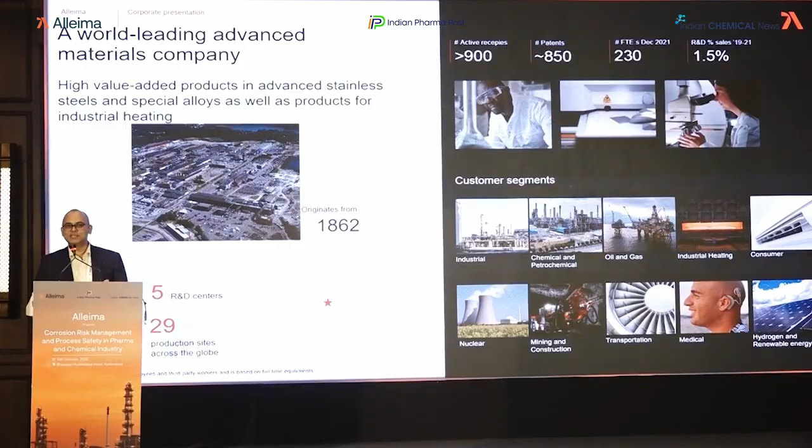All right, so this is already presented, but I think what is very important here is that we are an R&D driven company. That's a very old company, but at the same time, always in the market, we launch new grades. And thanks to you guys, in fact, you are the inspiration - you always come with a problem, and then we try to understand, okay, where's the gap, and then we try to give the solution, and then we come up with a new product. And that's how we grow, and we offer new solutions. There is not a single segment, Yadvendra already said, that we are not catering to - so you name it and we are there.

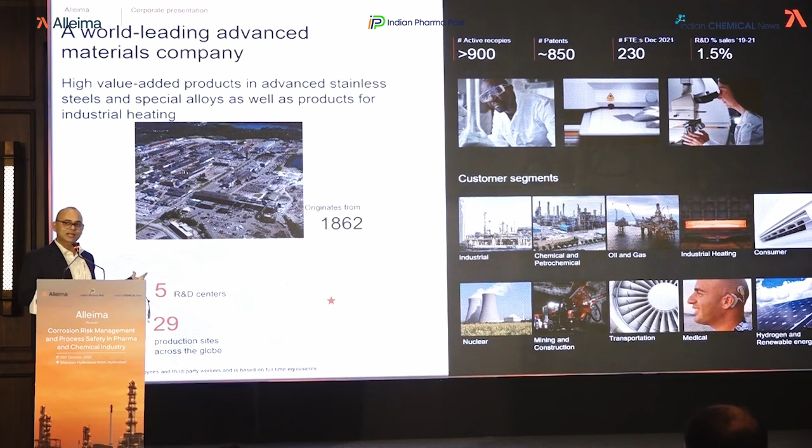Then out of the several facilities that we have, something very important that we call the workhorse of our lab is the scanning electron microscope. One facility that can give many kinds of information. I'd like to apologize here, I'll go a bit technical, but I think that is very, very important, and I'll try to keep it simple.

So you are using metallurgy in your day-to-day activities. You have heat exchangers, and you are using different grades. Whenever you have failures, you come to us - I'm talking about the different customers that we are serving - and what we do is we take a small sample out of that, prepare it, and put it in the electron microscope. This electron microscope is very, very useful. In that, basically, you have the accelerating voltage, and your electron hits the sample, and then you have different kinds of information. This information is like the chemistry of the material,

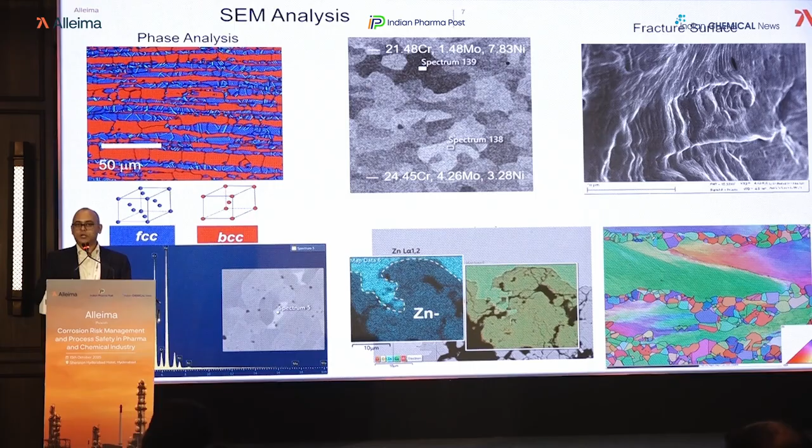So it's one facility, like one size fits all kind of thing. And then you can use this to check the quality of your material of construction, whether it's right or not, and it can also give you the failure trend.

So yes, we do a lot of failure investigation, and for that we are using this facility a lot. This is how we do the failure investigation. I've put it in a very simple way.

Whenever we receive samples from your application, the first thing we do is assign a case ID. This is how you track your sample, and then we preserve that, like a report or something, after this.

Then the first thing we start with is visual inspection, which tells you where the problem area is. Then we take samples from that - small samples from the bad location and from the good location - so that you'll have more data.

The next thing we do is prepare the sample. Sample preparation is very, very important. If you are not preparing it properly, consider it like reading a book with some ink blotted on it - then your information is not clear. Sample preparation is like that only, so you should do it very nicely. There should not be a scratch, otherwise there will be misinformation.

Then we take those samples for light optical microscopy, stereo microscope, and scanning electron microscope, and we put the data from this analysis together. Sometimes we send samples to an external lab - here Paresh sir is there - so we send to labs like TCR.

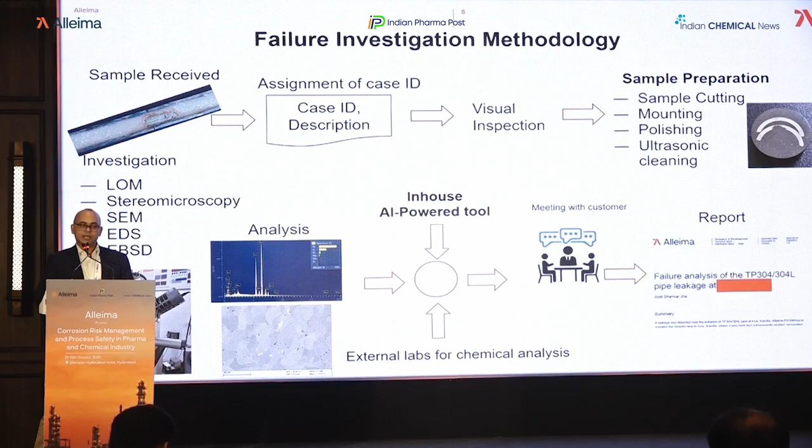All right, so this is how we use this AI. A very interesting thing going on in our organization is digitization - I think that's everywhere. We are a very old company, and the advantage we have is that we have reports, around more than 60,000 of them.

And then we have a tool we call Alleima Guru, based on all the 60,000 reports that we have. We have so much data, you can call it a gold mine actually. So you can ask this tool - I have such and such process, I'm using this grade - what can be the challenges, or what do you think could be the right grade?

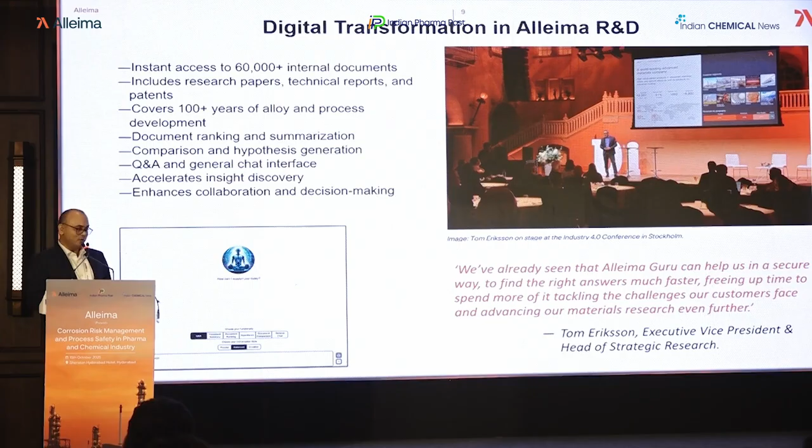This can help you in doing that, and we are using it a lot. Our Executive Vice President, Tom Eriksson, is in one of the conferences - the photo you can see is him in Stockholm in front of many customers talking about the Alleima Guru in the Industry 4.0 conference.

Let's look into some of the failure investigations. The one I'd like to bring to you is the ERW tube. This is the welded tube, and there are some weak points in welded tubes. We'll talk about that. This is how the tubes are produced for the heat exchanger - these are like ERW tubes, welded tubes.

So basically you take a sheet, round it, and then weld it - that's the seam. So what you're seeing is the seamed one. The other process is called seamless. Seamless uses the hot piercing technique, generally used for bigger diameter. But for smaller diameter, what's important is the hot extrusion process. We'll talk about the difference between hot piercing and hot extrusion, which was already touched upon.

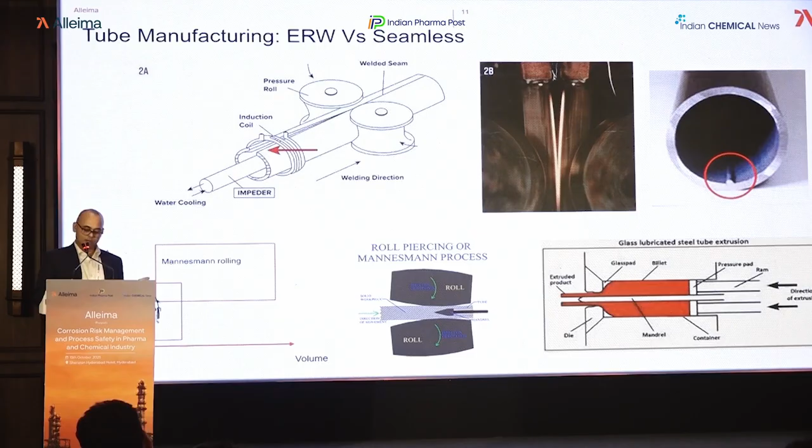Let's see what can go wrong with the ERW tube. My first example is when an ERW tube was used in one of the wastewater evaporators, and here you had chloride in the media. This was 316 Ti. This morning I was talking to someone who has the similar grade.

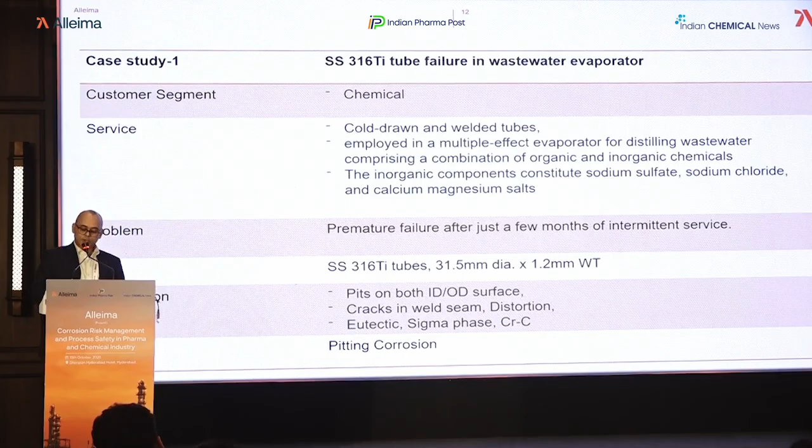Whenever you have a welded tube, you could see corrosion - some funny features here, sometimes you see something like this. This is on the OD side - this is how it was looking. From the ID side, the inner surface, you can see there is a seam, and on that seam you have some cracks, and you can see some groove features also.

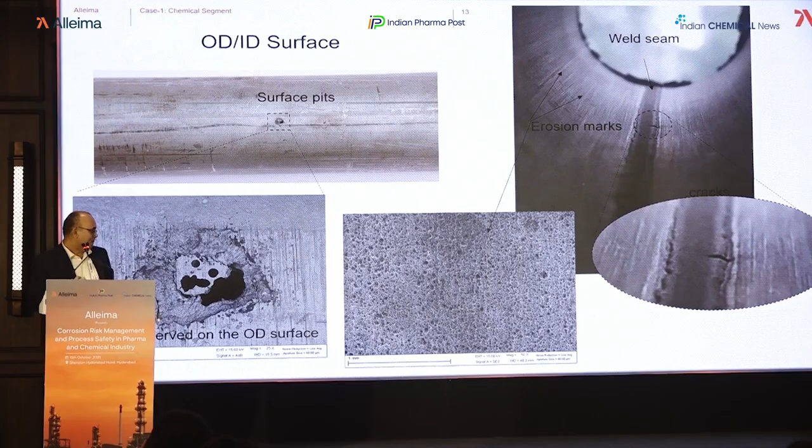Whenever you have a groove feature, that's a sign of erosion - your material is basically being removed. There were also a lot of pit marks. Wherever there was a crack, we took a cross-section, a transverse section, and what we could see is that there's a big pit in the welded area.

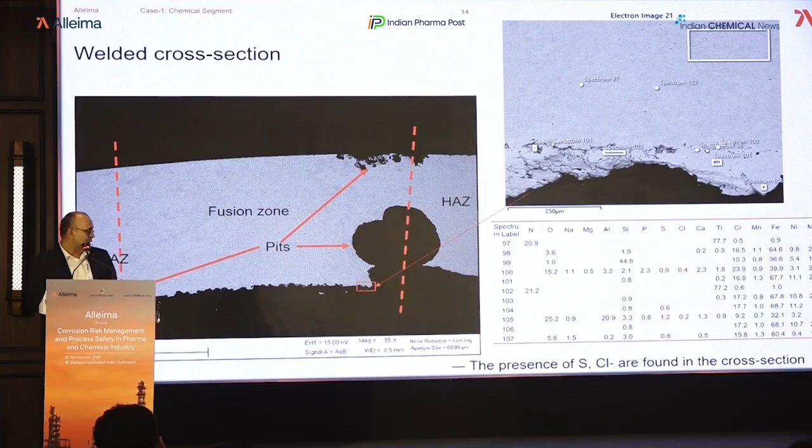Whenever you do welding, you have a fusion zone, and next to that you have a heat affected zone, which is basically at lower temperature. If you have stainless steel, that has its own challenges - we'll talk about that. We could see that most of the pitting occurred in the heat affected zone, but of course here we can see it was also in the fusion zone.

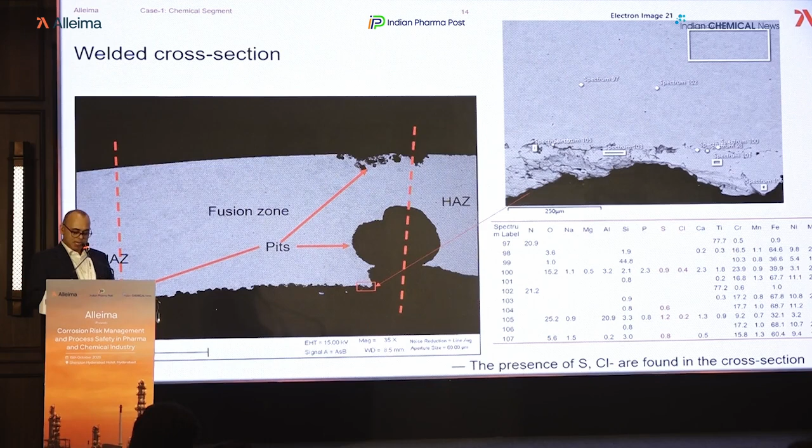Let's look into the microstructure in the heat affected zone and fusion zone. You can see there's variation in the microstructure, suggesting there is some temperature gradient. If you go from fusion zone to heat affected zone to base metal, you have a temperature gradient - going from fusion zone to heat affected zone, temperature varies from 400 to 800.

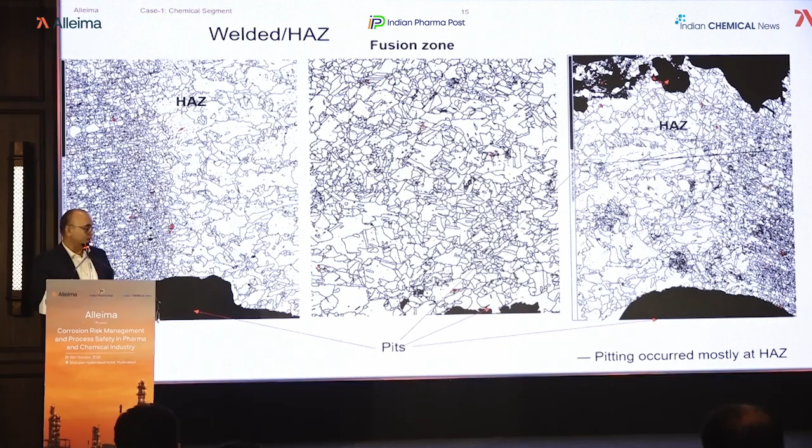In that region there are chances of intermetallic phase formation. So we use the EDS that I showed you to see what phases are forming. On the left-hand side, you have a bright phase at the grain boundary - that bright phase is generally called intermetallic, and it varies from grade to grade. There you have chromium and molybdenum, which are very important - they give you the corrosion resistance.

Then you have segregation of those phases at the grain boundary. What may happen is that overall your chromium and molybdenum percentage will reduce in the alloy, and your corrosion resistance will decrease. That's the harmful effect of this intermetallic phase formation.

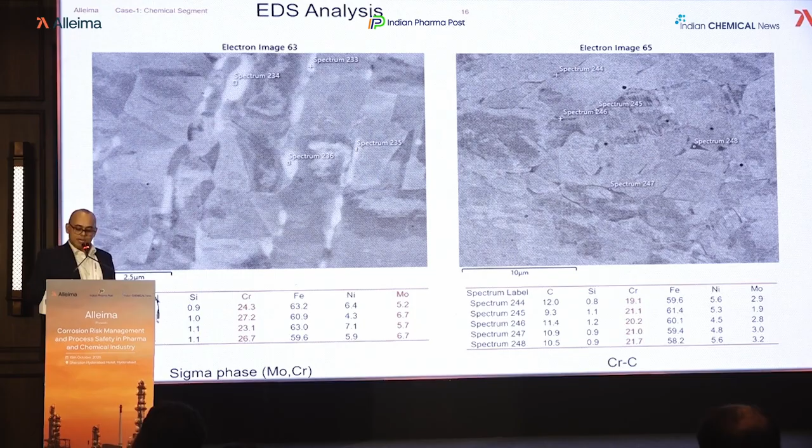On the right-hand side, you have chromium carbide forming at the grain boundary. If that chromium carbide is there, that's called sensitization in your material in the heat affected zone. Sensitization means if you have chromium carbide, then in the vicinity of that you have a depleted zone, which is prone to intergranular attack.

You can see that there's an intergranular attack. And then this is the schematic. If you have some sigma phase, that's an intermetallic, then what happens is your passive layer that basically protects or gives the corrosion resistance to stainless steel, that weakens.

And then if you have chloride in the media, the weaker region gets attacked by the chloride through this electrochemical process. And then your pitting, so pitting is a small corrosion pit kind of feature, it forms, and then it grows, and then you have leakages.

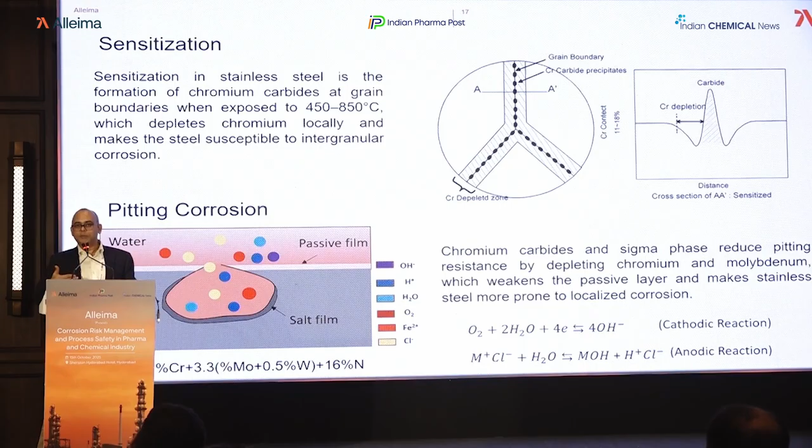So then the term you will hear a lot is PREN, pitting resistance equivalent number. So what will happen if such phases are there? Your PREN number will reduce locally. And in general, higher the PREN number, better the corrosion resistance. That is one way you can select the grade based on the PREN number, but that is a crude way, not the exact way. But in general, higher the PREN number, better the corrosion resistance.

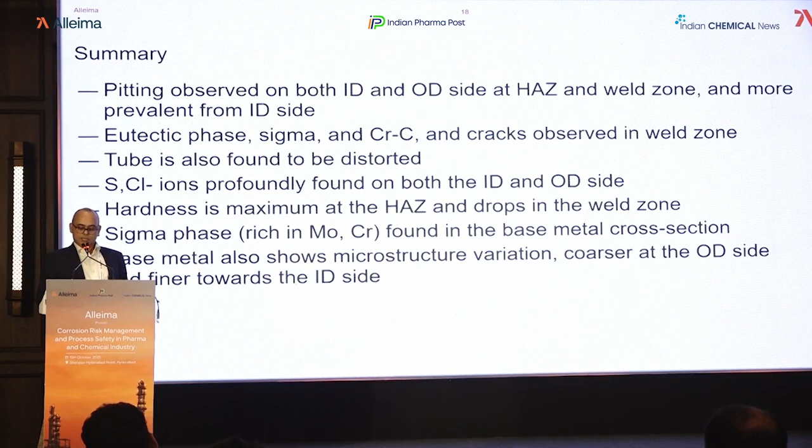So, summary of that is that with this ERW tube, you will have to be very careful if you are using it. There is a chance that you may have all those intermetallics form in the heat affected zone, exactly as happened here. Then let's look into the second example where titanium was used, and here also it was ERW, so it was welded.

You could see the condition of this. This was in the chemical segment, soda ash plant. And you could see how badly these tubes are - you have the scales on that. And seeing it, you can see that it's very brittle, very thin, and embrittled, right?

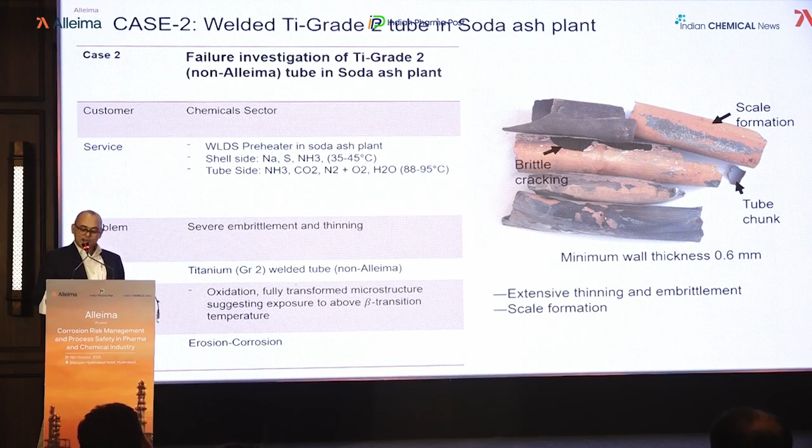So why it happened, let's look into. So then again, as usual, we do the same analysis, take a small section, and look into it under the microscope. So what we can see is a thick scale forming, that is titanium oxide.

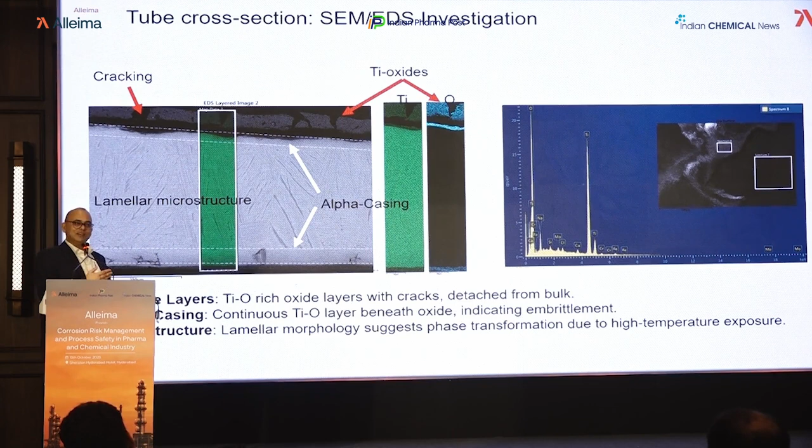And then in the cross section, the microstructure, if you know titanium, this is a very unusual microstructure. You don't expect that. Then again, it's not very clear, so there's another technique we discussed, that is EBSD.

So you get the colorful image, and you could see that these two case-like features, the layer kind of feature you're seeing from both sides, those are basically alpha case, we call it. And in the center, you have a lamellar kind of morphology. Ideally you should have an equiaxed kind of microstructure, but what you are seeing is the lamellar kind.

I worked in titanium a lot, so I know. This is generally when it is exposed to high temperature, and when you are cooling it, then you get this kind of microstructure.

And when we talked to the customer and asked, has it been exposed to high temperature? The customer agreed, yes, there was a fire accident actually in this plant. So this is like, I wanted to make a point about why this material selection is very, very important. What went wrong, I don't know, but this is a safety concern.

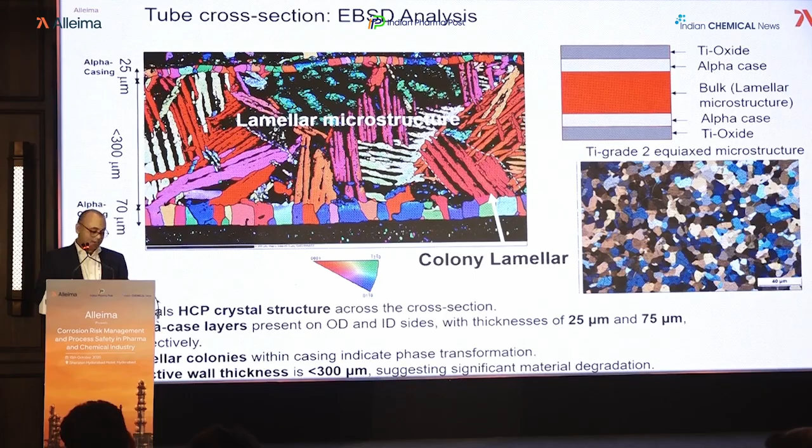So, yes, these were two examples where ERW tubes had some weak points, and it's better to go with seamless. But it is not like if it is seamless then it will not fail - no, that is not the case. Seamless does have problems, though it's better than ERW, but it still has problems if the quality of the tube, and when you're talking about quality, it's metallurgy, and it's also related to your processes. If that is not good - let's look into a few examples.

This you may be familiar with because this is from your pharma segment only. This is the mechanical vapor recompression system. Here you have a feed, and then a chamber that is exposed to high temperature, and your feed converts to vapor, and then you have concentrate, which you collect, and it again goes into your system. You have a high compressor that basically works on Boyle's law, so you have high pressure, and that gives you high temperature, and then again you reuse it.

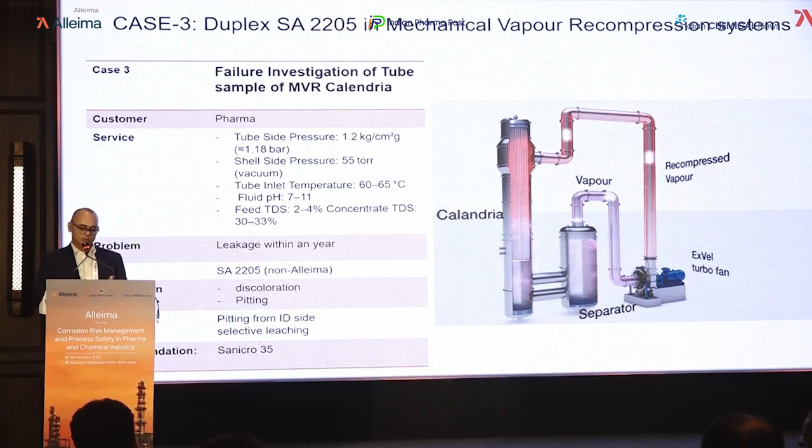So then here the material of construction was 2205 duplex, which we talked about, let's look into this. So this is the parameter - the feed parameter, you have chloride, sulfates, carbonates, all those were there.

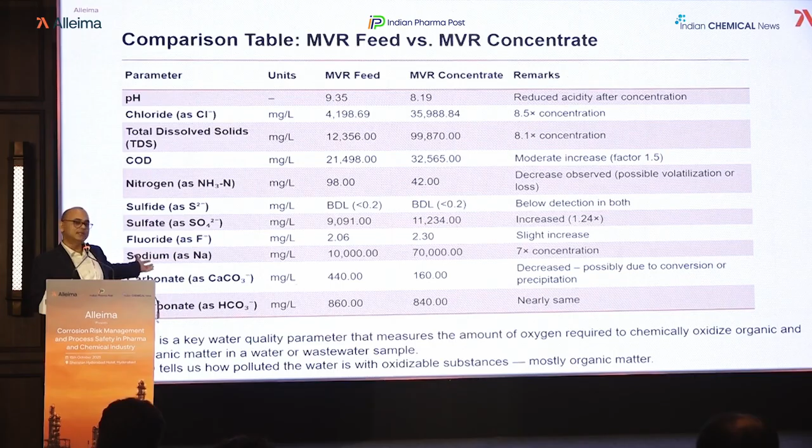And then, yes, this is how it failed. So on the OD side, you could see some discoloration, but the problems were mainly from the ID side. So you had basically the localized corrosion.

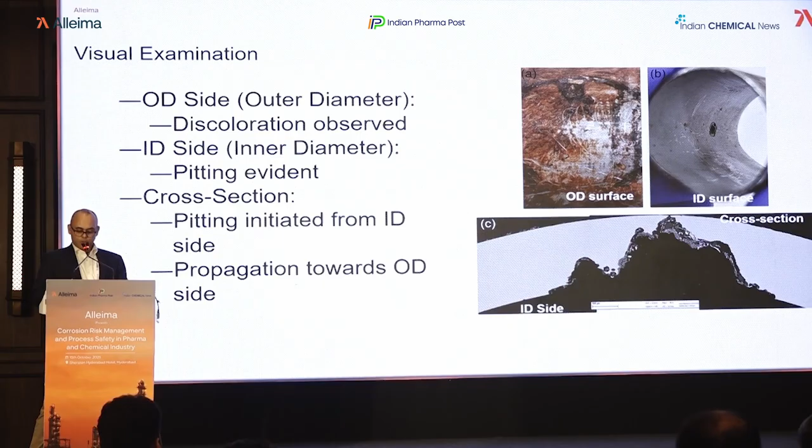Let's look into the phases. What are the different phases it has? So it was duplex, as I said, a two-phase austenite and ferrite. It was 50-50% austenite and ferrite. So that was perfectly all right.

But the problem is, for the two phases, you can do EDS analysis where you get information from both phases. If you see the chemistry, one phase has higher nickel but less chromium and less moly, so it has a lower PREN. On the other hand, the ferrite phase has less nickel but high chrome, high moly, and a high PREN number.

So due to the difference in chemistry, there is a difference in the PREN number. And if there is a difference in PREN number, and there is some aggressive environment, the one with the lesser PREN number will get attacked first.

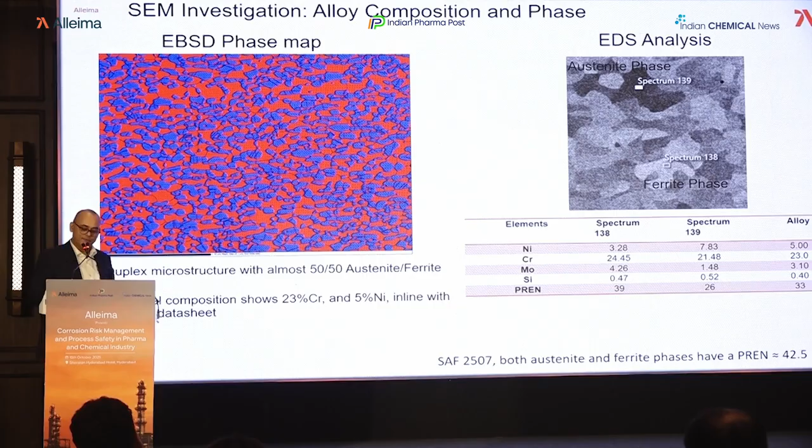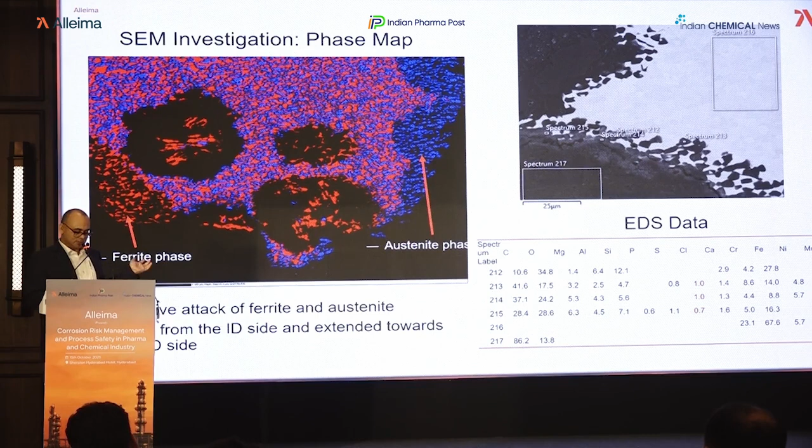We referred literature, and if there is imbalance in the chemistry, something like this can happen. We are still investigating this. So what we suggested is probably this is not the right grade for this application, and you should upgrade the metallurgy - we have a better grade.

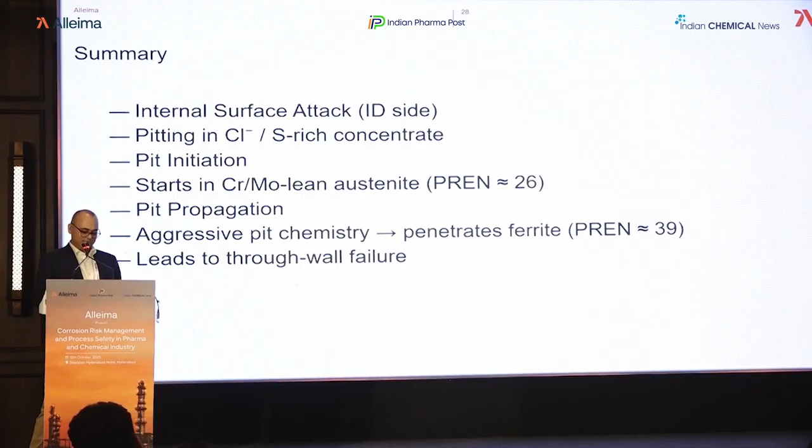You can go with the, say, hyper duplex - that has better corrosion resistance, higher PREN number. At the same time, you should have a balanced, tuned metallurgy, as we call it, so that despite the different phases, your PREN number is the same. We should have that kind of metallurgy despite the difference in the phases.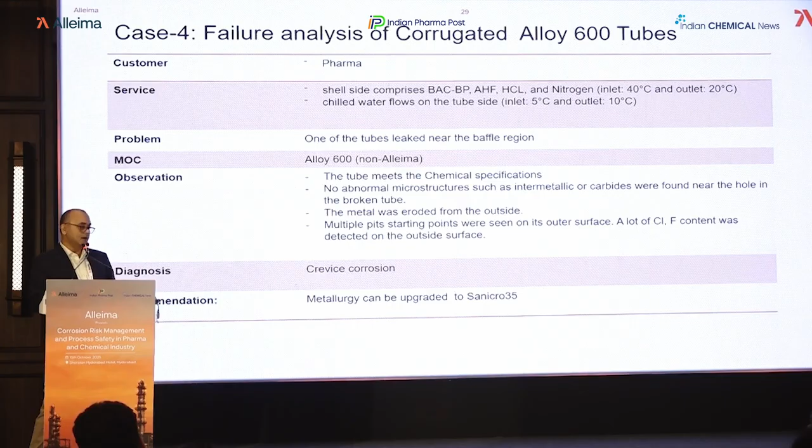And this is another example - this was alloy 600. Alloy 600 is really good material, and this is also for the pharma segment. Temperature-wise, not much, but we could see failure in this. This failure was not expected because metallurgy-wise, material-wise, microstructure-wise, everything was fine.

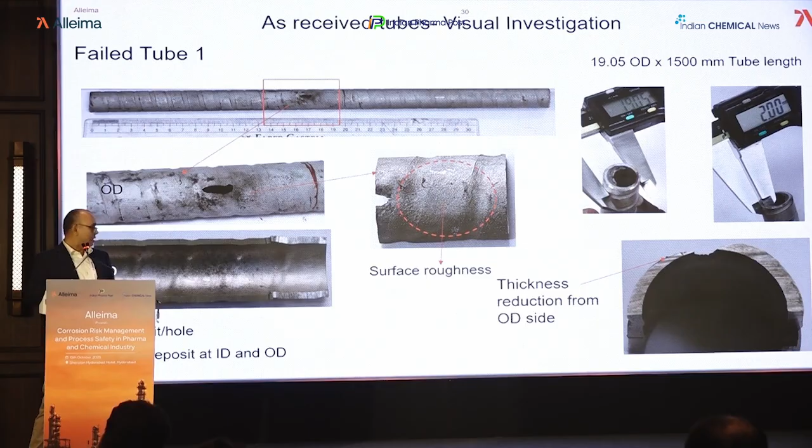But you could still see some localized corrosion on the OD side, mostly from the OD side. In the heat exchanger, you have a baffle, and if there is something wrong - like wear between the tube and the baffle due to vibration, or if the tolerance is not perfect - you can have wear, and then we could see some localized attack also.

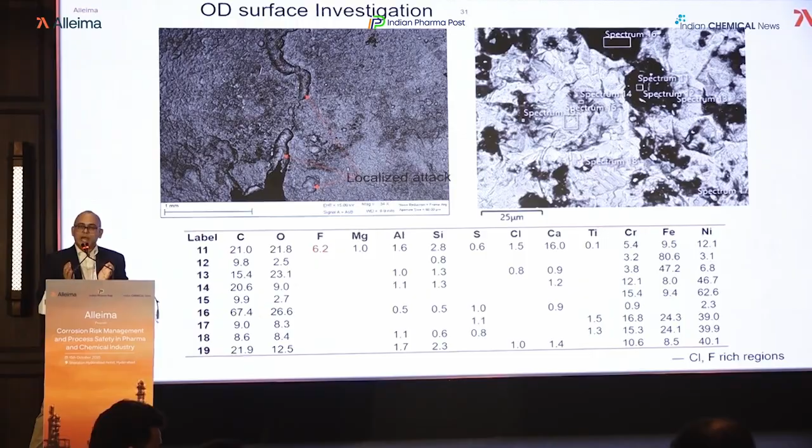You had chloride, and you may have initially wear, and that gives you a narrow region with aggressive media - that is called crevice corrosion. So probably this was the crevice corrosion. There are articles in the literature showing they have also seen similar crevice corrosion when they used alloy 625.

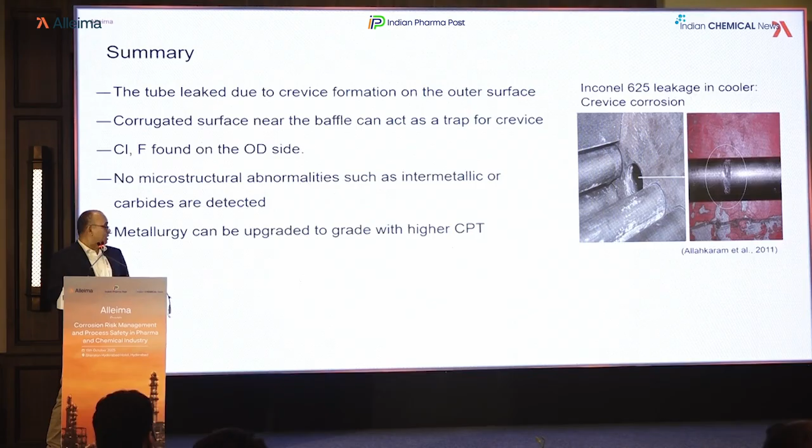Yes, we can again improve the metallurgy, or we can look into the design - how we can stop that. All right, so this was again very, very interesting and very relevant.

There was a customer in the pharma industry, and what they complained is that they had moly leaching in alloy C276. This is the Hastelloy, known for a very high PREN number. Hastelloy is a very good material actually, and you should not have such a problem. This was really bad - their entire batch was getting bad. So despite of the very good grade, high-end grade, you may have problems if your quality is not good.

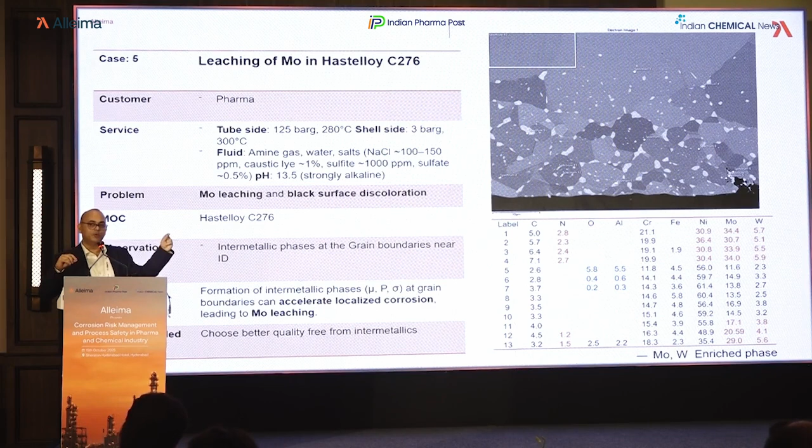When we looked into the material, we could see that there were some intermetallics forming at the grain boundary. This is basically related to a heat treatment issue. When your heat treatment is not right, this can be the problem.

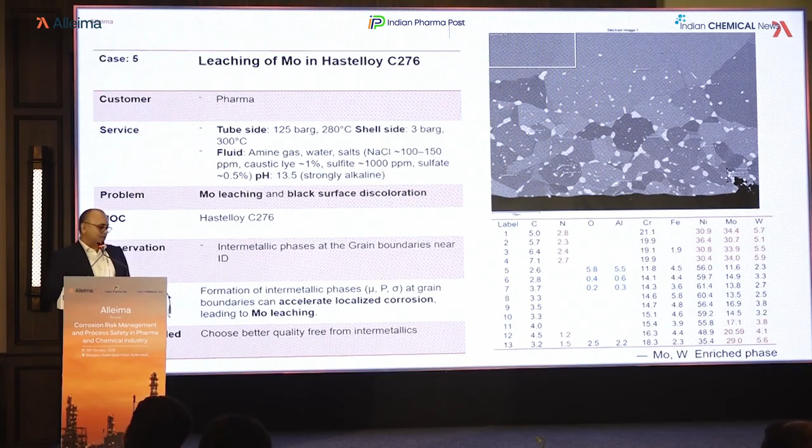Okay, so let's move to a few more examples. This is my favorite. Though it was not from pharma, this was from the chemical segment. And here, if you see the temperature, well, it's a very high temperature - the inlet side was 500 degrees, and the outlet was 55 degrees centigrade.

And then here the grade was 321, so it doesn't have moly. If you don't have moly, then your PREN number will be further less, down to 20. It has 19. If this had come to us initially, we could have easily told you this will not work.

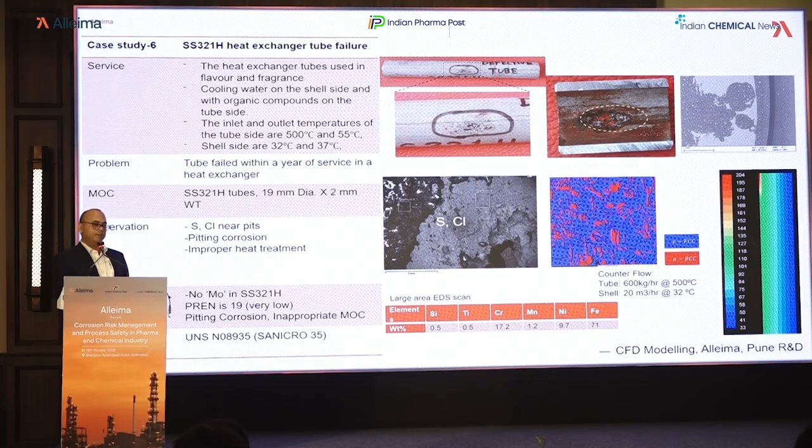But the customer faced a serious issue with this, and they wanted this sample investigated. There was pitting, and when we looked into the metallurgy, there were other phases. This was basically austenite phase, and we could see another phase which was ferrite phase. So your heat treatment, of course, was not good.

But now the question is, if it would have been the right quality, would it have worked? Probably not, because you have chloride also in this process, and at the same time, if you look at the temperature, it's on the much higher side. So we did a CFD analysis - that's a computer simulation where you can predict the actual temperature based on the real conditions.

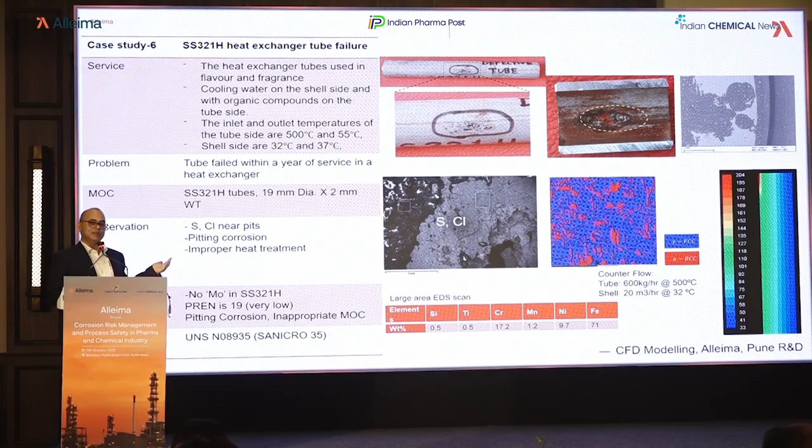And if you look at the CFD model, the temperature is around 200, and this austenitic grade having the low PREN number will not work. So here again we recommended the higher metallurgy, and the customer accepted that. Now it's more than 3 years and it's working nicely.

All right, so this is probably the last case, and this is from the refineries. Here again I'd like to touch upon the quality, how important it is. So here it was a super duplex non-Alleima grade.

And what we can see here - it failed just within 2 months. Why? Because you had something like intermetallic phase that we talk about, the sigma phase, and then you have nitrides.

So whenever you have nitrides like chromium nitride or sigma phase, the term called CPT, critical pitting temperature, will come down, and it started failing just at room temperature. So here the grade was right - seeing the temperature, super duplex should work here. But due to this problem, the heat treatment was the issue, so this didn't work.

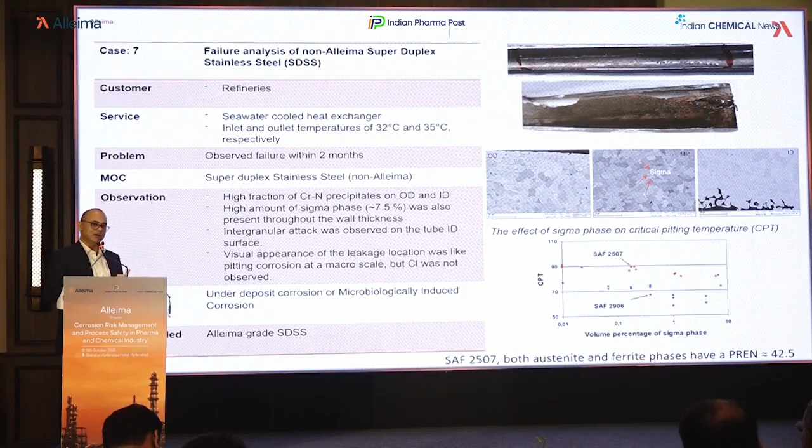All right, let me just now quickly explain what can be the quality issue. So here I have some examples where you have the same grade, TP316L, from different manufacturers. So same grade, different manufacturers - what can go wrong?

The ASTM standard says you have some specs. If you're talking about nickel, it should be between 10 to 14%, and it's up to the manufacturer how much they want to keep. Similarly, you have chrome and moly - they optimize sometimes based on the property they want to achieve.

So the same grade, and you see the difference in the microstructure. The tube A that you are seeing has a very coarse grain microstructure. If you have coarser grain, your strength will come down.

The second one you could see has an ID side - I still have the sample outside, and we can see that there's an attack on the ID side. And then the third manufacturer, you can see tube C - there you have the stringers of bright phase.

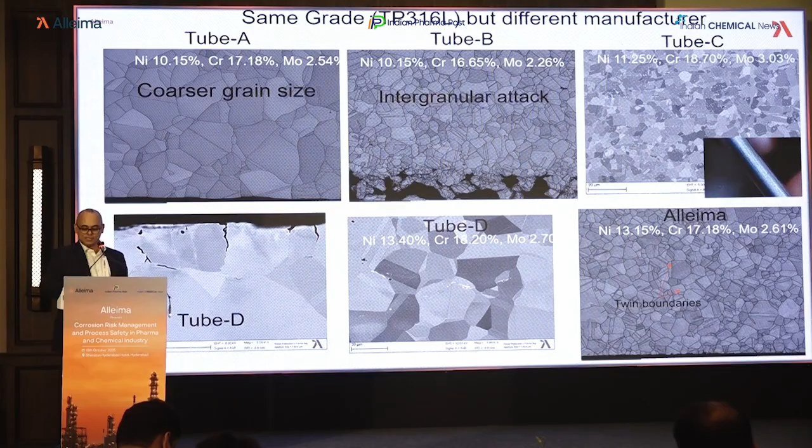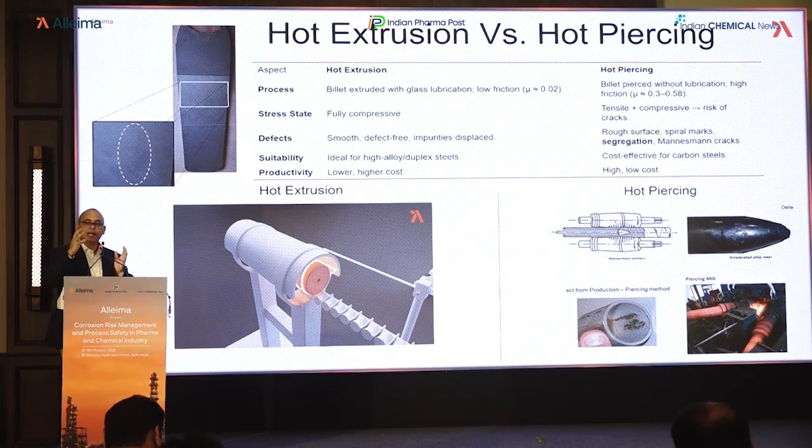And this morning, in the first half, Yadwen talked about these different hot working processes and how they can affect the quality. As he said, in the melt you have most of the defects in the center, and you need to remove those defects when you are doing the hot extrusion. That gives basically the higher quality.

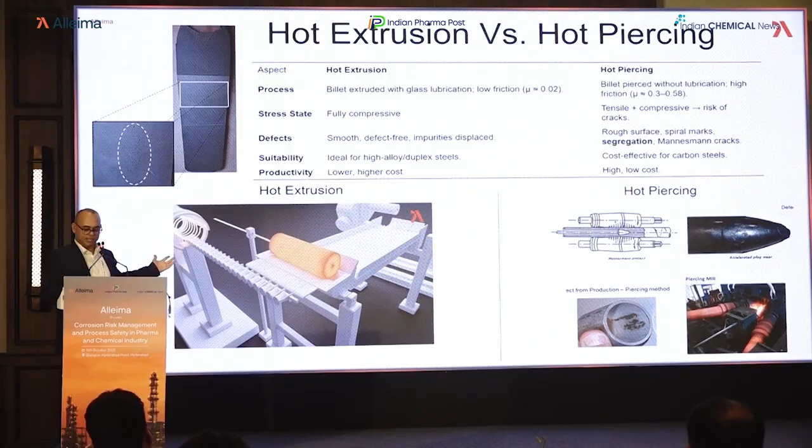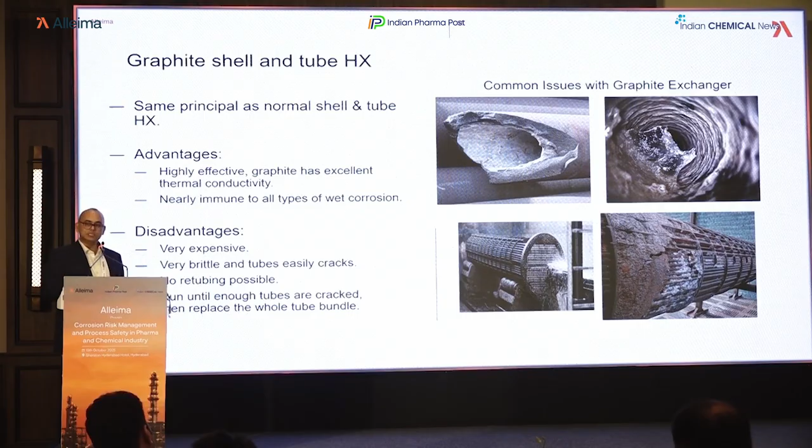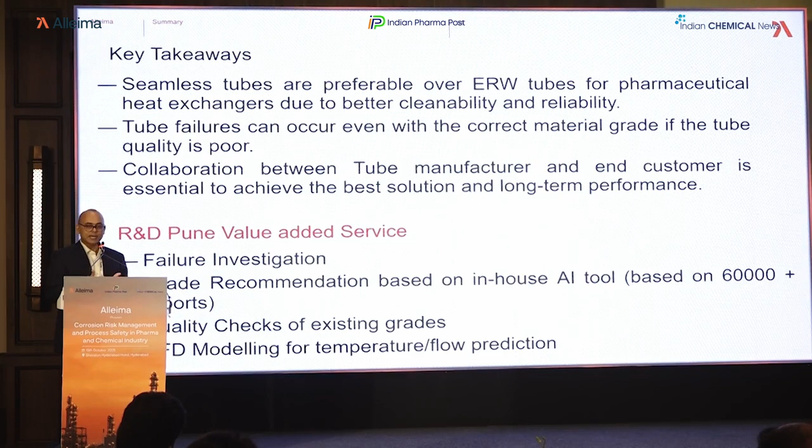So in fact, this is the key takeaway I would like to say - ERW pipes have weak points, so it's not a good idea to go ahead with those. You should choose seamless, of course. And the second point I'd like to make - even if the grade is correct, the MOC is correct, you should still focus on the quality.